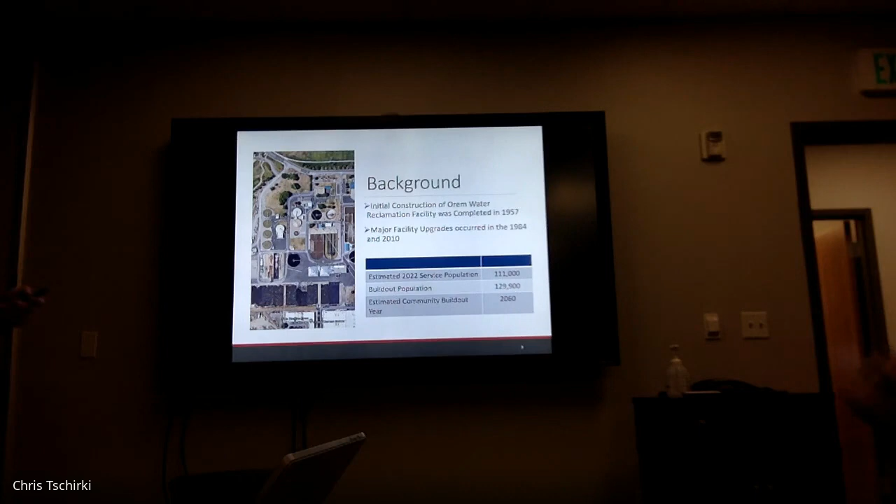Can I mention, the 111 might seem like a high number to you. That's not the population of Orem, that's our service population for the plant. So we service 100% of Lindon City, which is around 10,000 or 11,000 people, and then a small number of citizens actually in Vineyard. So it's more than just Orem City. That's a good

clarification. So the liquid stream process, the plant has a liquid stream and a solid stream. That's kind of how we looked at it. You can see outlined in red the liquid stream facilities. Oops, sorry. That one? This one? That one.

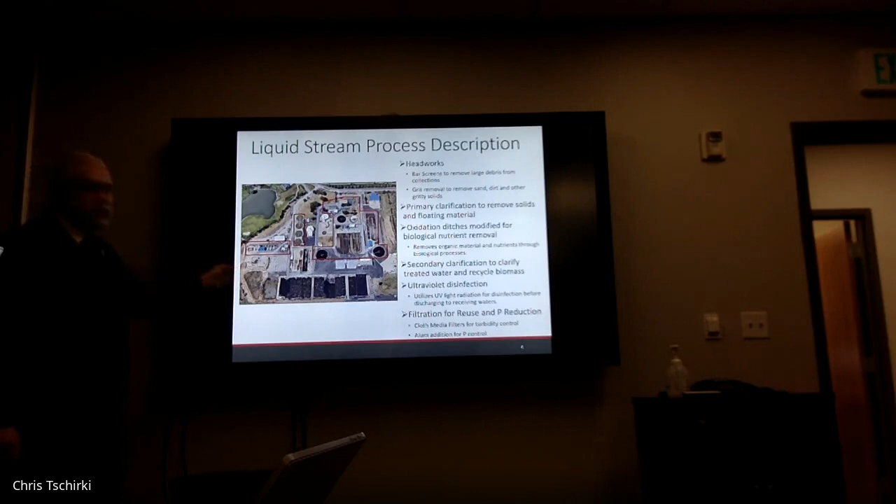So primaries, and then you go to headworks, from the headworks down to the biological process, activated sludge, nutrient removal, and then from there you go to the UV system. There's also a planned project for filtration, essentially to take the plant from a wastewater treatment plant to a water reclamation plant, and also do some phosphorus removal in the system. This has been expanded over the years. Some of it is dating back to 1957. Some of it as recent as the 2010 project. Go ahead, Giles.

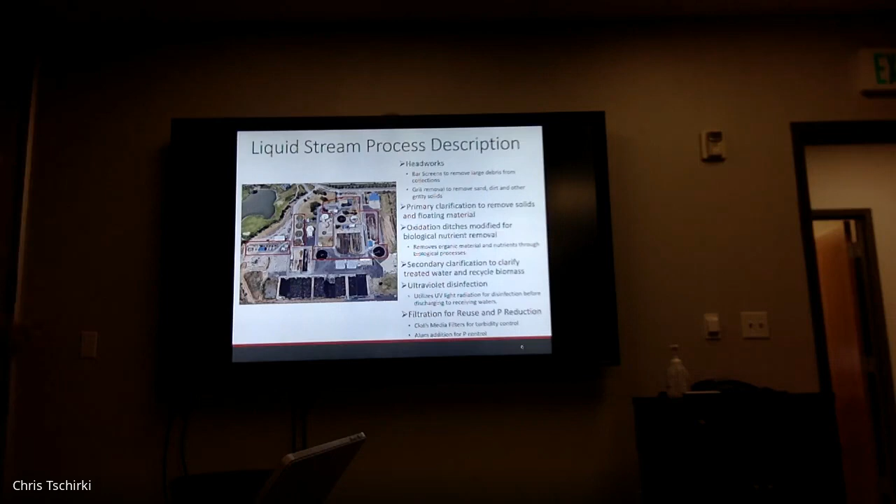Oh, sorry. Solids treatment. The plant actually has a two-step anaerobic digestion. Before that you have a thickening process, the DAF. That's one of these processes that needs to be revisited. You use belt press technology for dewatering. And then you still have sludge holding beds down here. There are a couple of these that don't have any lining. So that's the solids on a big level.

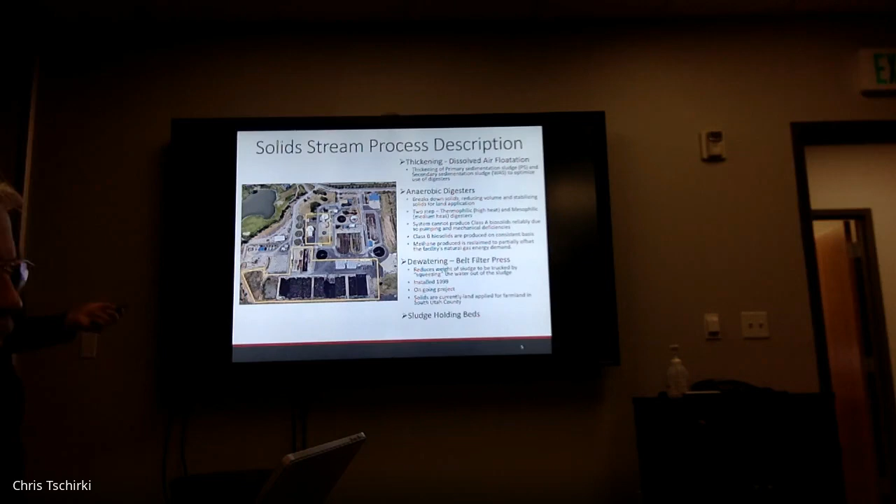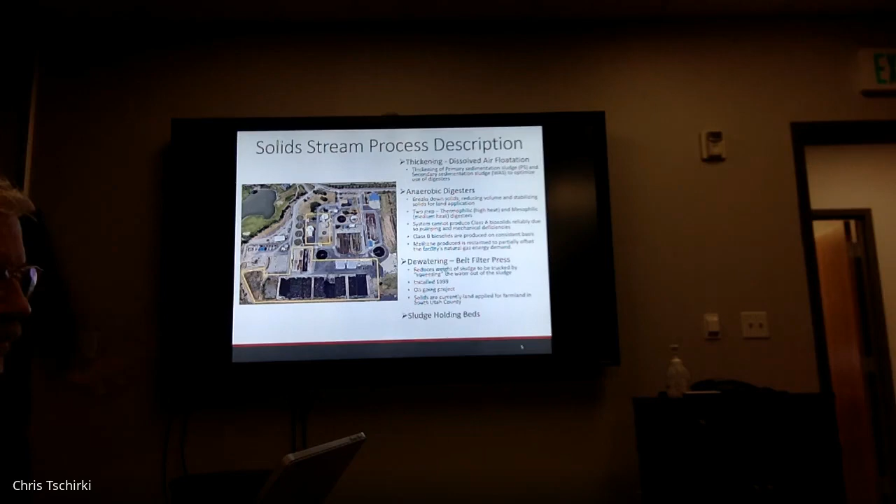One note to mention is they were intended to do Class A biosolids. However, there's not enough redundancy to reliably do Class A biosolids. Class B is doable, but again, this system usually is a very intense mechanical system. If you go to any plant, this is where you need most of the attention and most of the upgrades over the years.

John, can you explain the difference between Class A and Class B? Yes. Give me one slide and we'll get there. Okay.

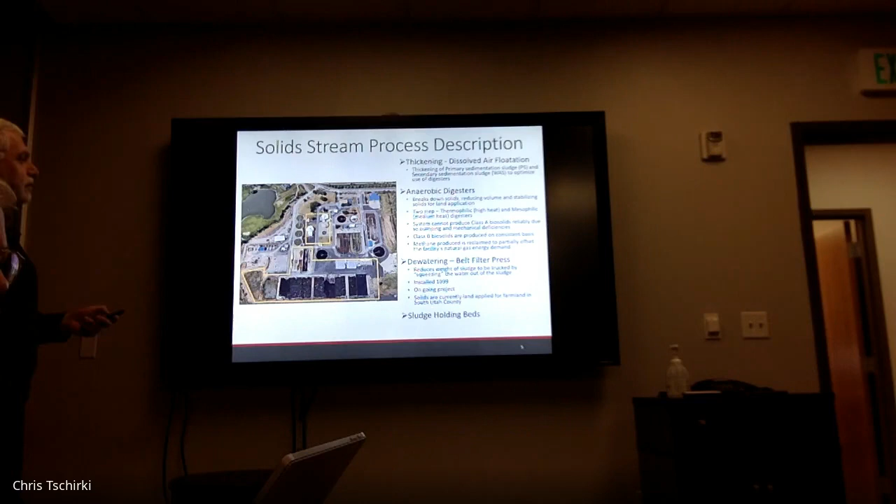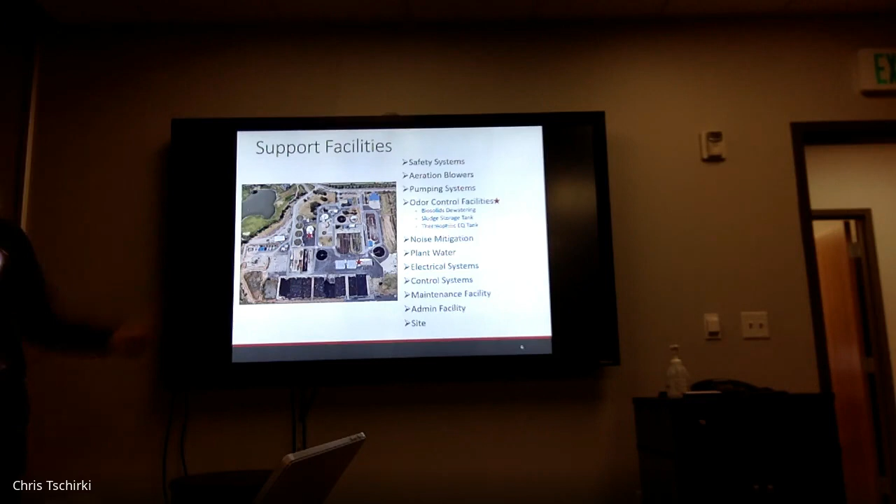So this is what the subject talks of. What we tend to forget when we do facility planning, we look at liquid, we look at solids, but those don't function if you don't have some of the support facilities. And those support facilities, from a planning perspective, cost you money. For example, the blowers for the aeration for the activated sludge process, you can argue that should be part of the activated sludge, but it's its own facility. Usually those things run between $10 to $15 million on a plant of this size.

When you build the building and you buy the equipment and you kind of equip them. Odor control facilities, those are critical to stay as a good neighbor in the community. Noise mitigation. The plant water system is also a considerable system that needs to be upgraded and maintained over the years to support all the other facilities. Most of the equipment has flush water and seal water, so you've got to maintain the system.

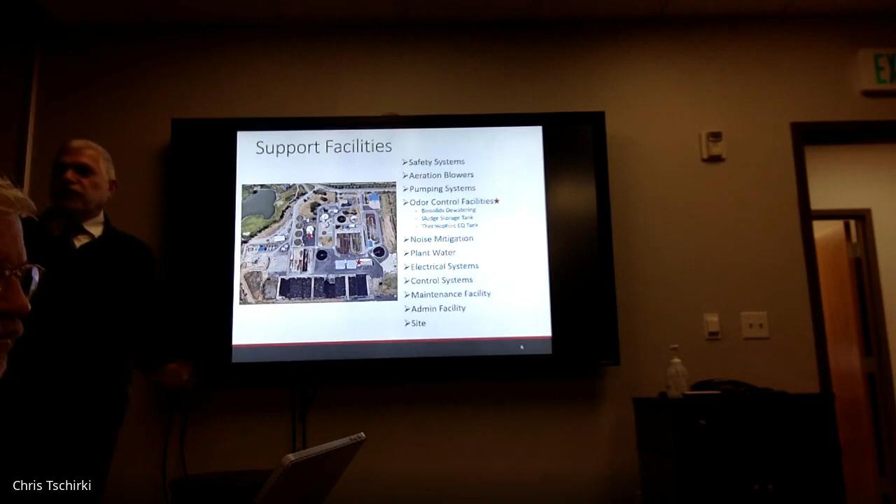And then the two big ones are the electrical and the control systems. If you have a control system that was installed 10 years ago, 15 years ago, guess what? It's outdated. It's the same thing as your iPhone and your TVs. It's old technology. You can't find the replacement parts, so you have to always update them.

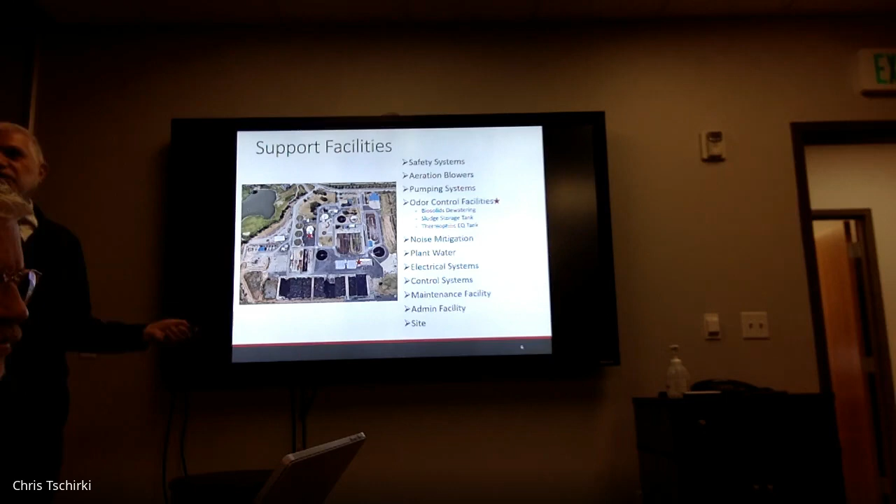And then there are some maintenance facilities. It's a big plant. The operations staff has been doing a great job maintaining it, but you need a place to maintain them. And some of these facilities, if you built them 50 years ago, they don't meet your current code, and then that becomes a safety issue for the staff. And then, of course, the site, you've got to maintain a clean site, paving and access to all the units. So these are all facilities that would require maintenance and planning.

To get into the process, we look at the treatment plant from two main aspects: hydraulics and solids capacity. So the flows are mostly the hydraulic capacity, and then you look at different scenarios. You have the diurnal curve. That's you starting with a peak hour. You've got to take the flow, and whether it's coming low or high, or whether it's raining or not raining, you've got to be able to keep the water within the basins and within the channels.

The annual average day condition is actually used mostly for budgeting. You plan for your chemicals, your electric use over the year on an annual basis. It's the amount of water that the plant receives divided by 365 days a year. The average day max month is your maximum month of the year. It doesn't have to be a calendar month. It's the 30-day rolling. And this affects your biological process.

Your peak flow sometimes is critical for some plants. They have equalization. In your case, you don't. So really the peak hour is what controls your hydraulics. And then the minimum flow condition, you want to look at that in case you want to avoid settling in the channels, or turn down on some pumps and blowers. So that's the different aspects you've got to look at when you're thinking about hydraulics.

Will you back up one? Sorry. I got it.

This one, right there. So you'll notice there's a box there in red. There's two numbers. In 2010, we did a major upgrade to the facility and had some design numbers that gave us a peak hour flow of 21.6 million gallons a day. We're bumping up against that number right now, running at 8.9 MGD as our average flow. We have an issue there.

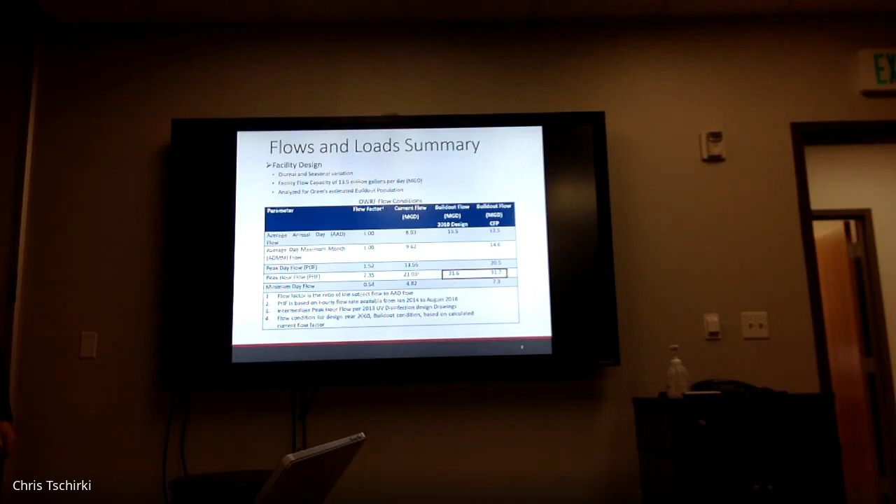So what kind of adjustments would you make? Bigger channels, more channels. Right now, our limiting factor of getting water through the facility is the UV facility. There are two channels. We cannot push the water through it. It will overtop the channels, and it shuts down the system. So it would need a third channel in order to get the water through it.

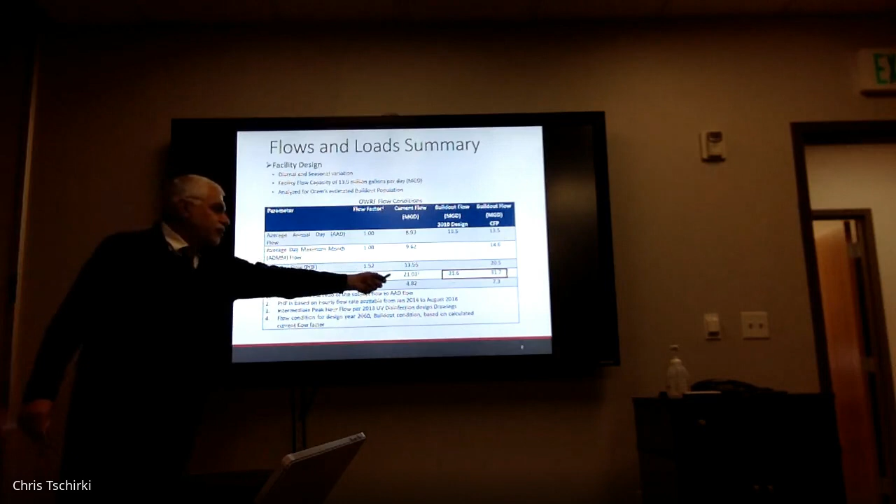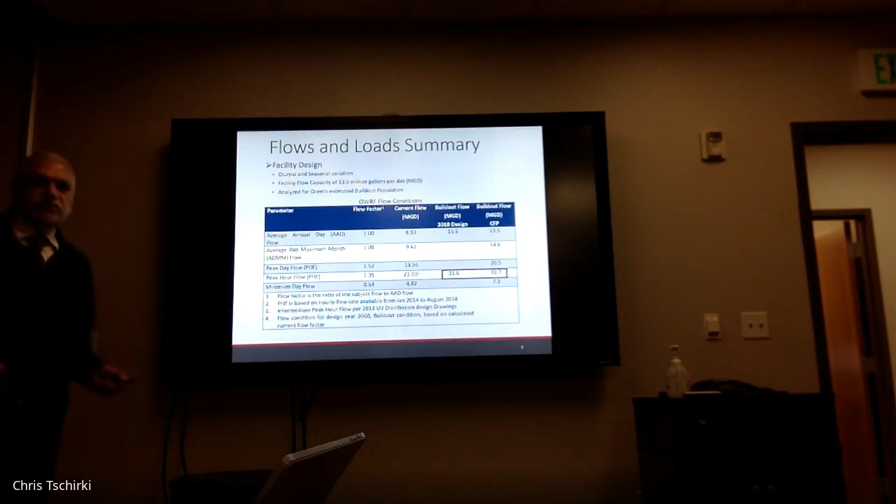And to expand on that, the way we did it is we took the current peak hour divided by the average, and we applied it to the 13.5 future. So would that change in the future? Possibly, if you have better infiltration controls and those things. But for now, this is a good way to plan this.

As far as concentrations, BOD, TSS, and now we get an ammonia. The plant has an ammonia limit. Phosphorus is becoming an issue, as you all know, and then potentially nitrogen, TIN, in the future. So we looked at all the concentrations.

The good thing is the 2010 project planned for 350 milligram per liter BOD and TSS. We're seeing lower than that under the current conditions. That's good if you're not doing denitrification or having lower BOD. If you're going to have to do denitrification in the future, you need higher carbon to be able to sustain the process without supplementing carbon. So we looked at it from both aspects, from the low BOD and the high BOD, and then from the nitrogen aspect.

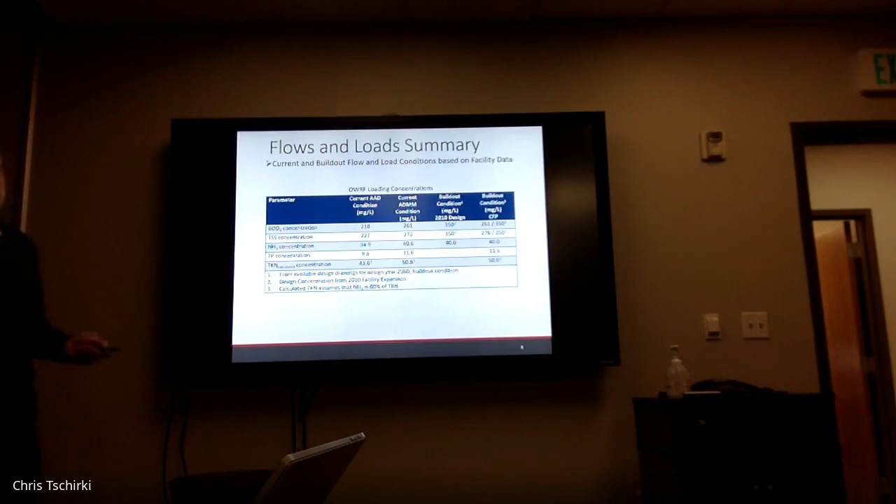And again, these are numbers that should be watched continuously, because as the community ages and matures, you have different development, different kinds of residential, you get apartments versus single family dwelling units. These numbers will vary, and if you get better infiltration and flow controls, the strength would go up, but the flow would go down. So you gotta watch these numbers. But I haven't seen it much higher than 350 on domestic plants. That's a good high number to plan for.

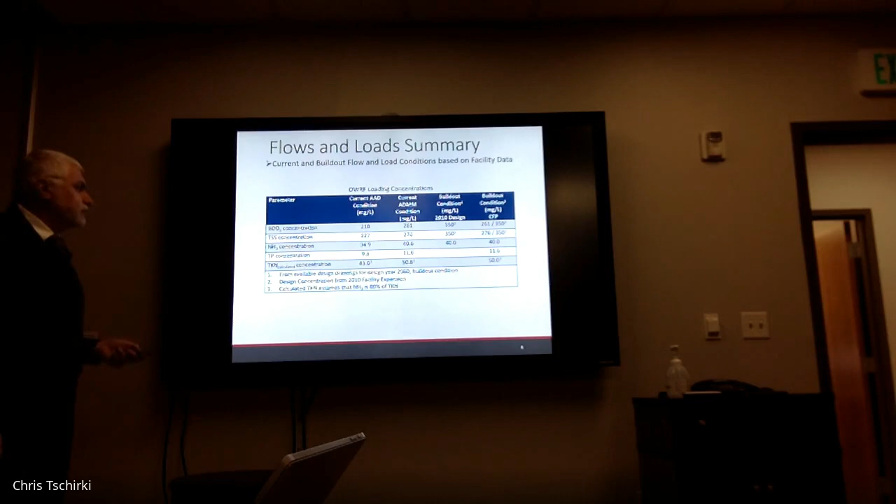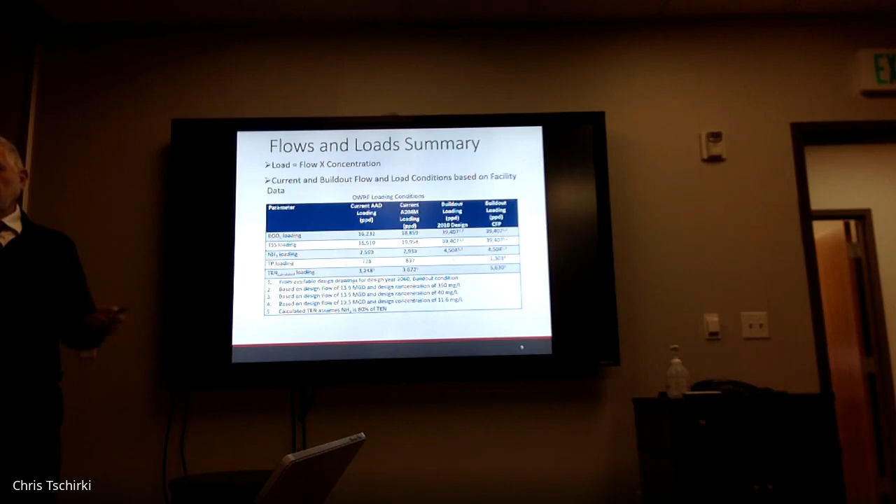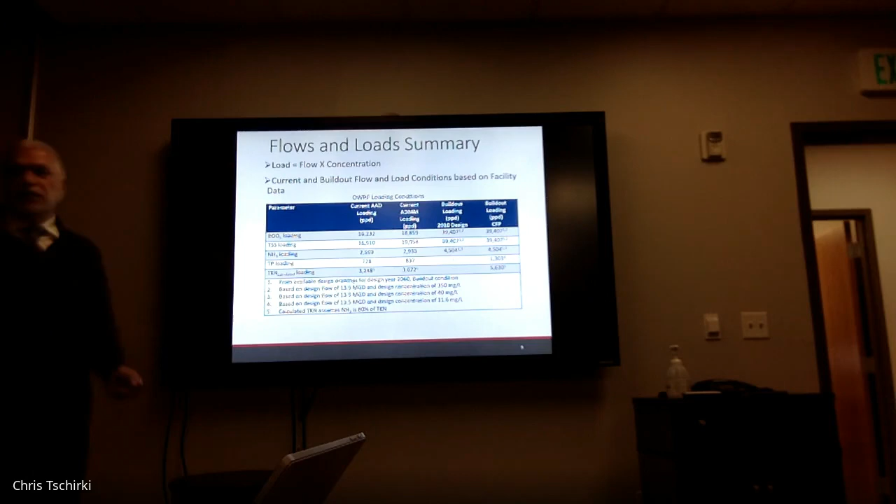You have plenty of basins in the ground to be able to take the future capacity. What you're lacking is some of the mechanical system upgrades to meet the new regulations. That's in a nutshell what's going on with this slide. These are very important numbers for us to be able to plan or design facilities. And for the activated sludge process, we really focus on the max month condition, the average day max month, the 30-day heavy loading that you're going to get in a year, not the week or the day or the hour. It's the sustained 30-day.

This is a summary of what matters to which facility at the plant. So screening, for example, you need to focus on peak hour and the minimum flow. You don't want settling, but you don't want to overflow the channels or overwhelm your screens. To Giles' point, if the peak hour flow is 31 MGD, we gotta revisit that facility. Grit removal, same thing. Primaries, it's mostly the loading, but the peak hour also affects the weir loading, so you gotta pay attention to that.

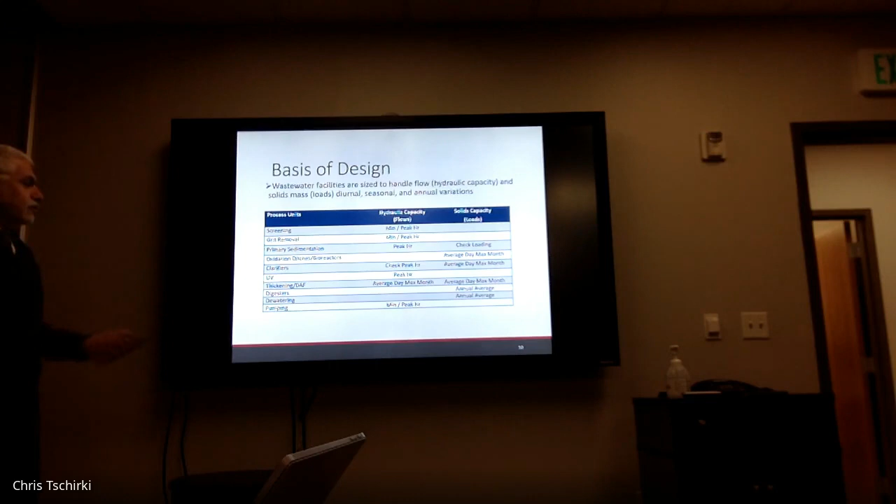Oxidation ditches and bioreactor, like we mentioned, average day maximum month condition. Clarifiers can be both. Most of the time, it's the solids loading that's controlling, but you also have to check the hydraulics, especially during the peak hour condition. Like Giles mentioned, the UV channels are peak hour driven. If you don't have enough to take the 31 MGD, you have to deal with it. Thickening is a loading condition, and the digesters also are a loading condition.

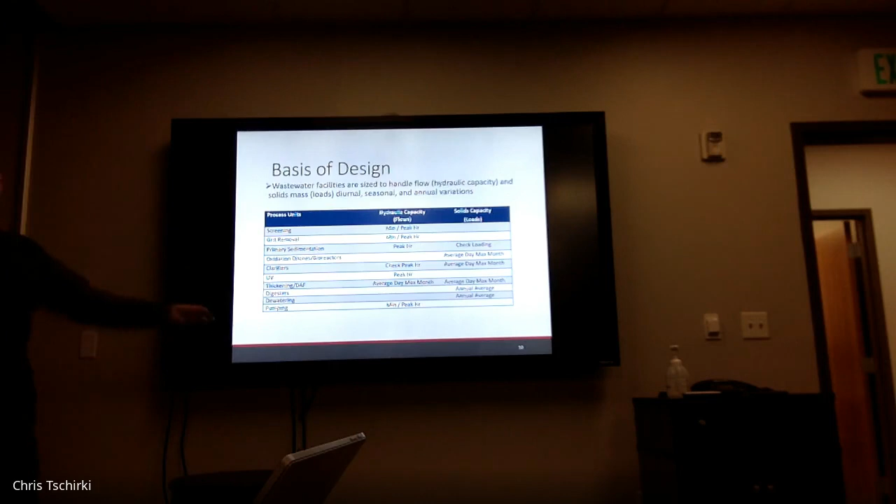So that's in a nutshell what we look at, and there are various pumping systems. For example, the primary effluent pump station, that's a hydraulic condition that we have to account for. So this is from what's coming into the plant. Now, what does the plant have to meet from a regulatory standpoint? You have the liquid stream. The plant is already operating under BOD, TSS, and ammonia limits. And then there's the phosphorus limit that's coming up in 2025. The date's sliding a little bit, but you still have to meet that date by 2025. There's potentially in the future a TIN number less than 10 milligrams per liter that you have to comply with.

And then there are other things that are going to happen. Everybody's talking about contaminants of concern, NDMA, other things, you name it. We can have a long list that you have to plan for. The site has enough capacity to deal with that, depending on what you have to deal with in the future. Solids treatment, there are the Class A and Class B classes that you can treat for, mostly for pathogen reduction and vector attraction.

And to Chris's point, the nice thing about Class A is, once you produce Class A, you need less documentation, you have fewer restrictions on where you can dispose of the sludge. It costs you more money because you need more digesters and you need to hold it longer at a higher temperature. So it costs you more money to operate. But you don't have the potential legal issues over the years.

The future constraint with sludge disposal: as everybody knows, there is very big concern that land application may not be allowed in the future. Is that going to happen or not? We don't know. There are potentially some new contaminants coming up that may also limit this, PFOA and other things. So that's something you need to keep in mind in case you need to do additional treatment for the sludge in order to avoid land application.

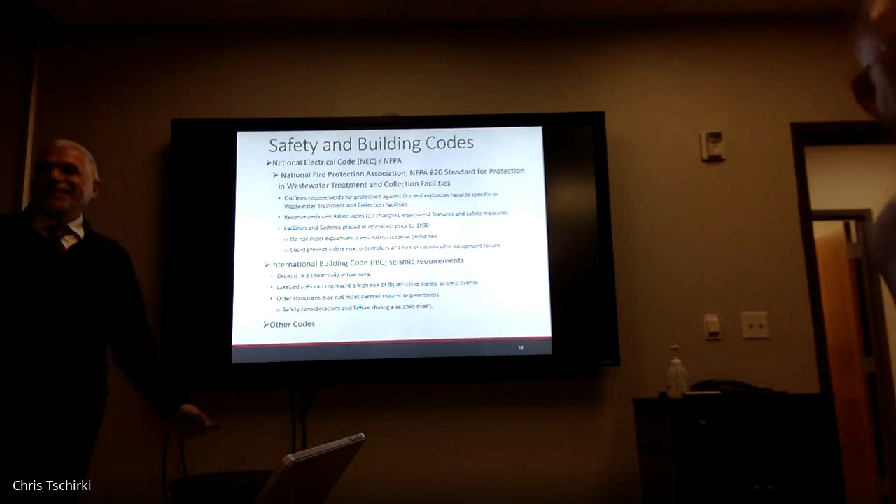You're talking about high numbers, other organizations, government agencies. What about us? What numbers are we looking at? We'll get there. I figured you were getting to that. All right. You want me to cut to the chase? Can you get the last slide? There's a reason why I didn't give you a hard copy, because I know what executives normally do. Go to the back page and then send us back home, right? Yeah.

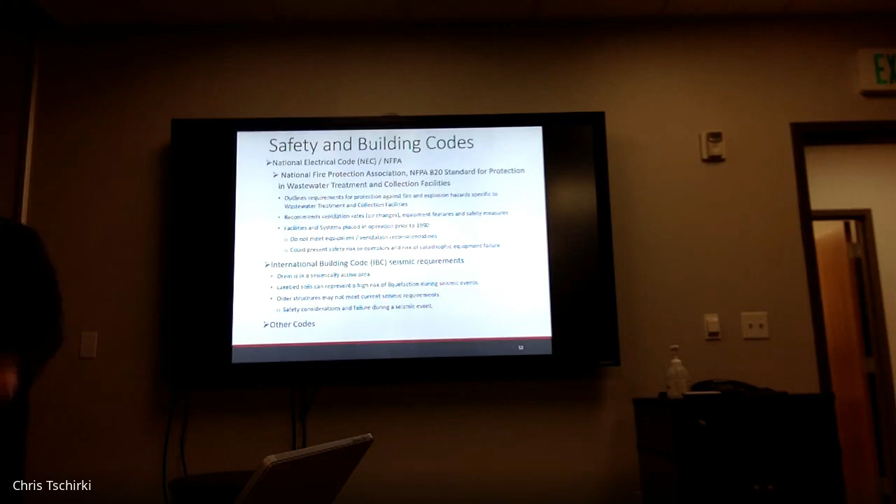So the other aspect we looked at is, like we mentioned before, other codes. This plant has been expanding since 1957. There are some new codes, seismic codes, NFPA 820 codes. Where do we meet them? Where don't we meet them? And how do you apply them? You don't want to just wholesale it and come back and say, oh, this plant doesn't meet the current seismic code, let's just take the whole thing out and put a new one in. So we didn't want to do that. So that's where we went in and looked at codes. And there are some other codes like that, all the latest plumbing codes and electrical codes. But really, these are the two main ones.

The other things that you look at is whether the plant has safe access to equipment. Does it provide a safe work environment? The reliability of the equipment and the facilities, the redundancy. So there's a couple of facilities that didn't have enough redundancy that are critical for you. For example, the UV system. You've got to be able to take a channel out of service while you're still managing the plant flow. You don't have to do it during a peak hour event, but you have to have enough reliability in the UV system. It's a major disinfection step in the process. And a couple of others, like the primary effluent pump station and a couple other facilities that don't have enough redundancy.

So before you jump on that last one, that firm capacity, that's actually a state requirement that says I need to be able to take my largest process unit out of service and still meet all of the permit requirements. Well, don't hate me for that one. There's some interpretation here. Like if you have 3 pumps, you've got to be able to take the largest pump out of service and be able to run the system without it. Same thing for blowers.

Where there's some forgiveness, for example, is on aeration basins. Very few agencies would tell you, oh, if you take the largest aeration basin out of service, you've got to have another one to replace it with. Unless you're a very critical operation, you don't have to do that. You can play the timing, or you can say, look, I don't need to take a basin out of service. I can fix mixers, I can fix the aeration system without taking the basin out of service. But you have to make sure that you can do these things. You can't make that claim and not give the operation staff the tools and the procedures to be able to do that.

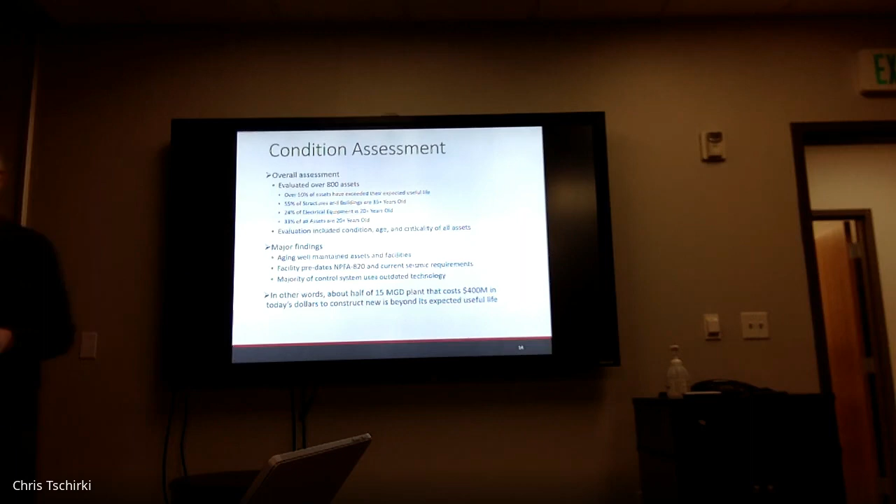So the good thing is they were still using them. So they're doing a great job maintaining them, but you're beyond most of the expected useful life of some of the facilities. The big one is the electrical and the controls. So those are a little bit outdated. And they all looked in good condition, but some of them didn't. Because of corrosion, you have a lot of panels that are sitting in areas that are corrosive. The material wasn't set for that area, so you see a lot of signs of corrosion in some of the specific plants, especially on the primaries and the solids.

So the way we looked at these assets, we looked at condition, we look at age, and we look at criticality. If it's a piece of equipment that if it fails, it's going to cause you to violate or to cause a safety issue, that's a high criticality piece of equipment. If it's something that would have just caused a nuisance or just give you an alarm, you can go and fix it the next day, then that has a lower priority.

So what we found is, as expected, a lot of the facilities did not meet the NFPA 820 code, especially on the primaries and the biosolids and the solids side. And the majority of the control systems use outdated technology. They can't even find parts to replace some of these devices.

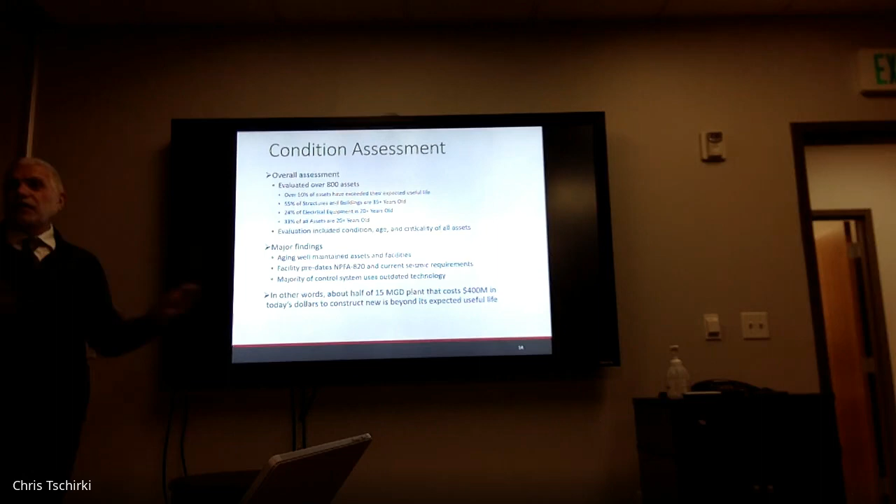But to put it on a higher level, we thought, well, okay, if this is a 15 MGD plant that you're trying to construct today, you're doing primaries, nutrient removal, biosolids treatment, two-step digestion, anaerobic digestion, you have UV disinfection, develop the entire site. I'm thinking these days it's $400 million. We can argue whether it's 350 or 420 or whatever, but you're in that range. You're not going to build a similar facility for less money. And you can think of it as half of this investment is already aged, is already outdated. So keep that in mind. We're not trying to get to that number, but that's one good comparison.

So when we look at all the things we have to deal with, of course, budget and money is a big concern for everybody. So how do you balance between risk and budgeting? Well, the first thing you do is phasing, and you set priorities, right? So we're proposing 4 phases. Phases 1, 2, and 3 are driven by the condition and the current regulations. Phase 4 is a future step that you may implement or you may not, depending on whether the nitrogen rules are implemented in the state.

So to get into the numbers and what do we do now to fix phosphorus, and to what Giles mentioned, there's the DNR improvements, the side stream TP removal. That's part of phase 1. I think this is already being worked on. Giles, you now have the plan for it and the instruments. But these are the high critical facilities, the ones that could cause safety problems. You don't have enough redundancy to meet the current permit, and you've got to improve the phosphorus issue by 2025. So those are the high critical elements.

These also have some criticality to them, not as much as the first ones. The headworks, because of the price tag, we had it here initially, then we moved it here. We said we could live with the headworks, try to work through it until we build the headworks building. And then these are less critical items in phase 3.

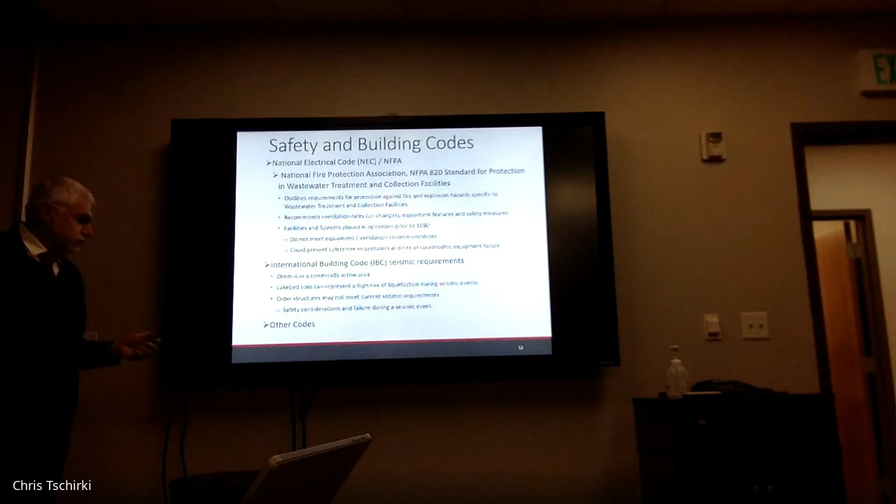So the phasing, the first phase, what's the time frame on that? It's 5 years. Is that for each phase? Yes. Drop into that last slide. Keep going. It's the one with the timelines on it. One more. That one shows our timelines.

If we change zoning in areas, flows and loads can go up. So this is the snapshot right now. If everything holds true, the facility is designed to take us out to 2060. If the zoning changes, it may not. As a consultant, I shouldn't say that, but unfortunately it's a fact of life.

These are treatment plants that are heavy in mechanical systems and electrical controls. Even if you don't do phase four, after 25 years you will have to do some improvements that would cost you probably $20 million. This is the nature of these treatment plants. They last forever, but you've got to maintain them and you've got to upgrade.